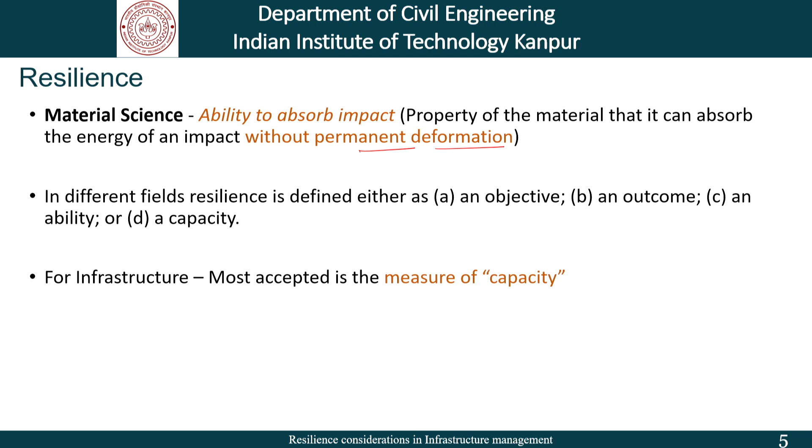In different contexts, resilience is often defined either as an objective, an outcome, an ability, or a capacity. For infrastructure, resilience is generally known as a measure of capacity. The United Nations Office for Disaster Risk Reduction defines resilience as the capacity of a system or community at risk to absorb, adapt, change and withstand the results of hazard in a timely and efficient manner, including through conservation and reconstruction of its structures and core functions through risk management.

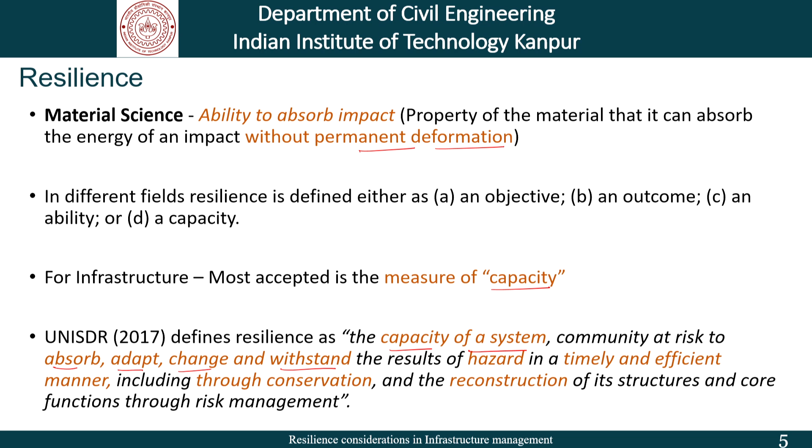Let us look into some key terms in this definition. As mentioned, resilience is a measure of capacity. So, resilience is defined as the capacity of the system to absorb the impact, then to adapt, change and withstand the results of a hazard, and this must be done in a timely and efficient manner. This could be through conservation and reconstruction. We will discuss some of these terms in detail in this lecture.

Let us break down this definition and see it from a different lens. Resilience, when talked about in a comprehensive manner, includes risk reducing strategies for the following aspects. The first is risk reducing strategy before the event, so before the hazard or event has occurred, you want to reduce risk. Second is coping on time, or facing the event in an efficient manner.

The third aspect is efficient post-event response. Once the disaster has occurred, how efficiently can we respond after the event. Fourth is efficient recovery measures, how quickly we can recover our assets again. And finally, how well can we adapt and transform so that in future the impacts of such events can be reduced.

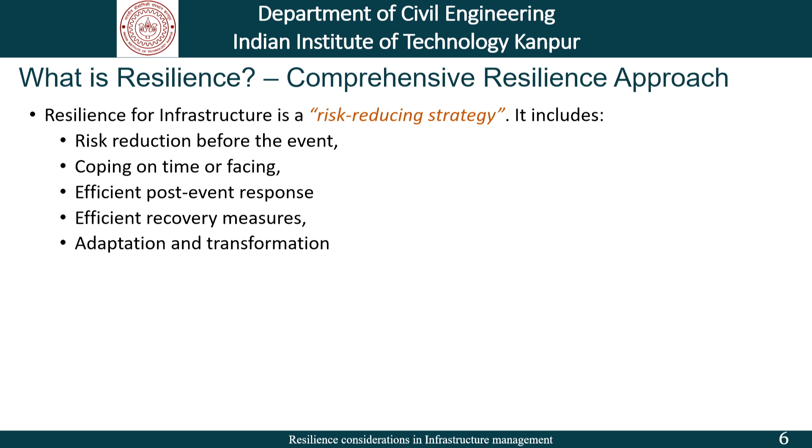So, a comprehensive resilience approach includes different aspects of risk reduction before the event, during the event, and after the event. In case of after the event, you want to ensure there are recovery measures in place so the infrastructure can be recovered quickly. Moreover, you want to adapt and transform so that in future the impact of such disasters can be reduced. Resilience thus deals with maintaining and enhancing the ability of a system to absorb, adapt and recover.

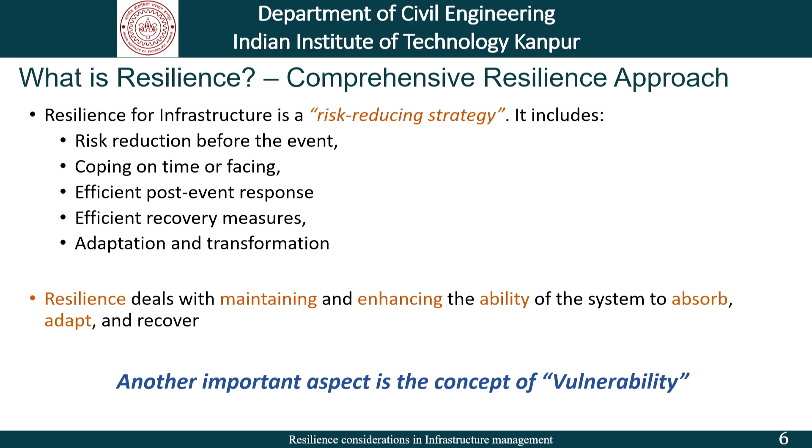In order to understand the concept of resilience, we must understand another important term, which is vulnerability. Before we discuss vulnerability, let us discuss the difference between a hazard and a disaster. Are these two terms different or are they the same? Please pause the video, think about it, and then proceed.

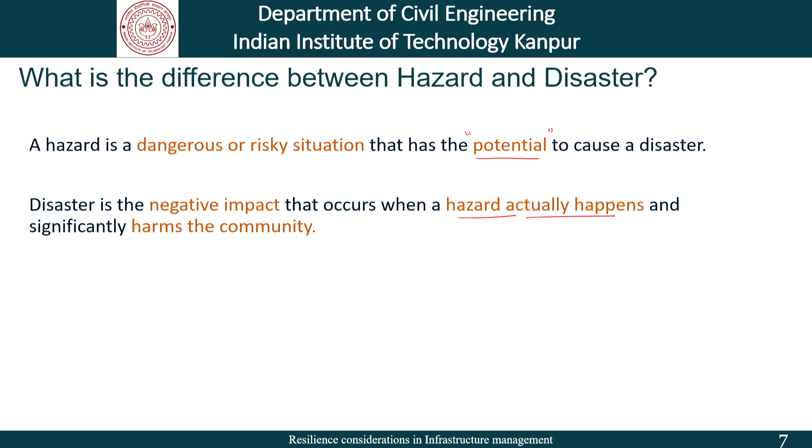Hazard is defined as a dangerous or risky situation that has the potential to cause a disaster. That is, any event which is risky or dangerous and has potential to cause a disaster is a hazard. Disaster is the actual negative impact that occurs when the hazard actually happens and it significantly harms the community. So, hazard is just a risky situation that has the potential to cause a disaster, while disaster is the actual negative impact faced by communities when the hazard actually happens.

To summarize, we can say that the likelihood that a hazard would lead to disaster is governed by the term vulnerability. That is, if you have a system which is highly vulnerable, the likelihood of a hazard becoming a disaster is very high. On the other hand, if you have a system which is not vulnerable, a potentially risky situation or hazard will not lead to a disaster, it will not significantly harm the community.

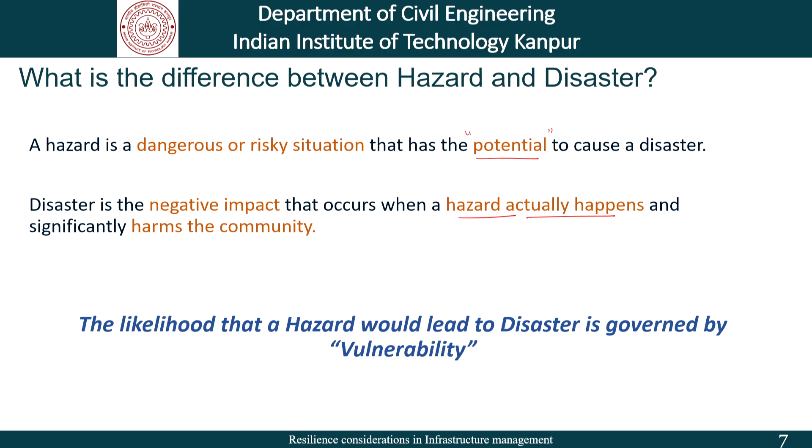Now, let us focus on different ways of understanding vulnerability. One good way is to divide it into three aspects: the first is physical fragility, the second is socio-economic fragility, and the third is lack of capacity to respond.

The first one is physical fragility, which means that the infrastructure, the human settlement, or the structure under consideration is itself vulnerable. It is physically vulnerable and cannot withstand the impact of a disaster. This is physical vulnerability or physical fragility.

The next one is socio-economic fragility. This means that in addition to the physical infrastructure, if there are some disadvantageous conditions, aspects of social segregation, or vulnerable populations which are more vulnerable. This second aspect deals with the community. Any disadvantageous conditions, aspects of social segregation, or presence of vulnerable communities define the socio-economic fragility. The idea is that vulnerable populations are more susceptible to a hazard compared to other members of the community.

The third aspect is lack of capacity to respond. Here we focus on the ability to mobilize resources so that the impact of a hazard can be reduced. So the three dimensions of vulnerability are: first, physical, the infrastructure itself; second, socio-economic, the community and people around it and the impact of infrastructure on them; and third, the capacity to mobilize enough resources to absorb the impact of hazard. These are the three dimensions of vulnerability.

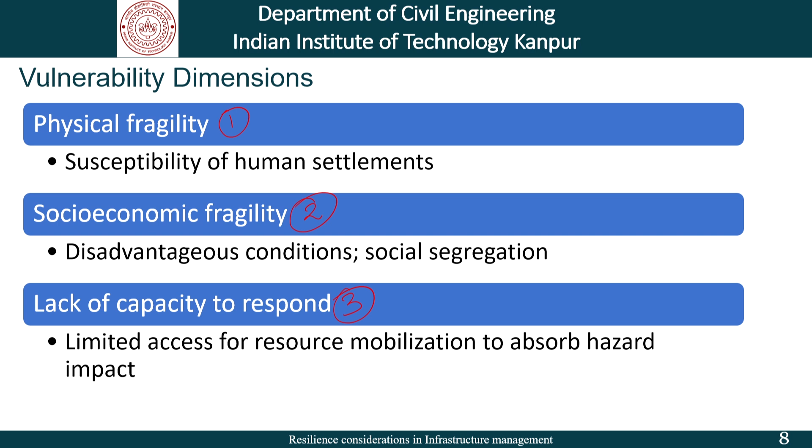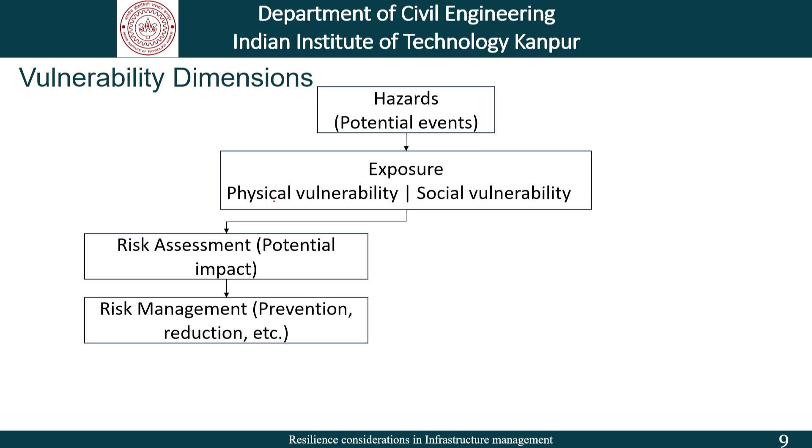Next, we try to understand the exposure levels as well as the intensities of hazards to do a comprehensive risk assessment, where we try to understand the potential impact of this particular disaster if it happens, and accordingly come up with different risk management strategies like prevention, reduction, mitigation, etc. However, we cannot always be successful, and there will be cases where these hazards actually lead to disasters. Disaster can be considered as the impact of this potential hazard.

Once there is a disaster, the focus shifts to disaster management. That is, once the disaster has occurred, you want to ensure that its impact is reduced and that you can recover quickly. So I hope the aspect of vulnerability is clear, that it focuses on both physical vulnerability and social vulnerability. The idea I want to communicate is this: in addition to infrastructure resilience, that is the resilience of the physical infrastructure, we also need to tackle socio-economic conditions. In doing so, it is possible to increase the resilience of communities to cope with an event, recover quickly, and build stronger to avoid future disasters.

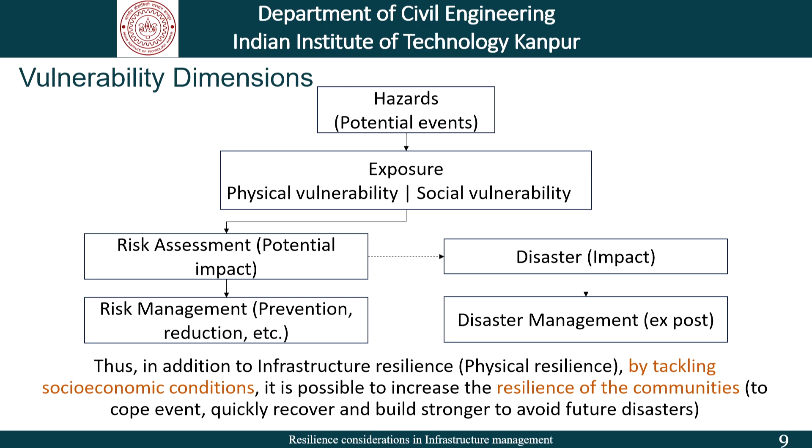Having discussed hazard, disaster, and vulnerability, let us move back to the idea of resilience. Resilient decision making for infrastructure includes two aspects: the first is developing or building resilient infrastructures, and the second is developing or building infrastructure for resilience. These are two sides of the same coin. In the first, the focus is on ensuring that the infrastructure we create is resilient — asset resilience, that is, the physical strength of the components.

For example, can the bridge withstand the earthquake? Or service resilience — the ability to maintain the service. Can the power grids reroute electricity if the line goes down? And so on. So in the first aspect, the focus is on making the infrastructure resilient.

On the other hand, the second aspect is developing infrastructure for resilience. This goes beyond the infrastructure under consideration and focuses on broader societal benefits, where the question is: do you have enough infrastructure to ensure community well-being and economic stability during the crisis event? Moreover, do you have systemic resilience, that is, does it help in managing large scale risks like climate change? So I hope the concept is clear that resilience includes both creating resilient infrastructure and creating infrastructure for resilience.

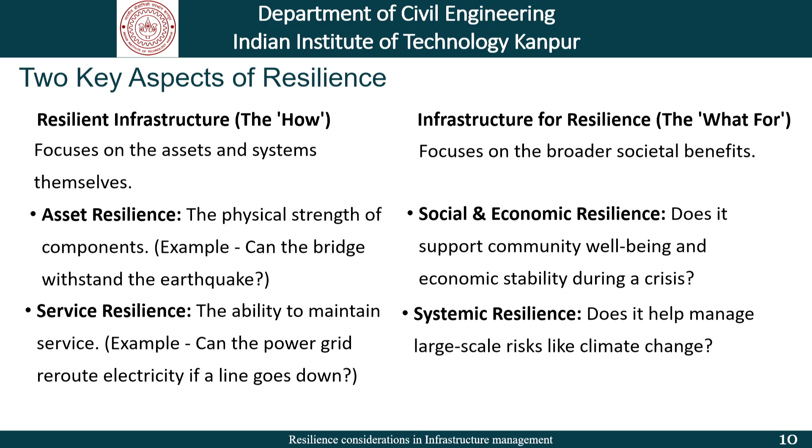Moving on, let us discuss why do we care about resilience? Why do we really need resilient infrastructure? Why are we concerned? The infrastructure which we have is always under stress. This is a key challenge which we need to adhere to. The systems are always under stress, and this stress can come from several reasons.

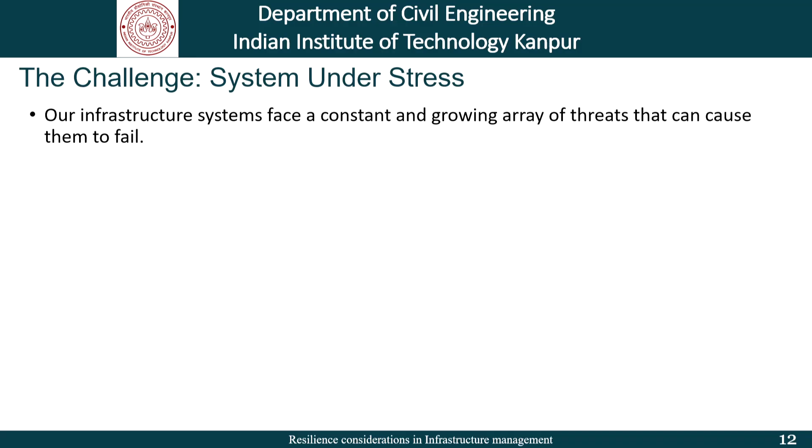Our infrastructures have to face a constant and growing array of threats which can cause them to fail. Let us discuss some of the reasons for these stresses. It can be things like natural hazards, for example earthquakes, floods, cyclones, landslides. Each of these impact our infrastructure, putting stress on our systems.

Second, there can be aspects of climate change, rising sea levels, extreme heat, droughts, etc., which again stresses our systems. Additionally, there can be systemic shocks like pandemics, supply chain collapse, financial crisis, and so on. There can also be man-made threats like cyber attacks, physical attacks, human errors, and so on, which again stresses our infrastructure.

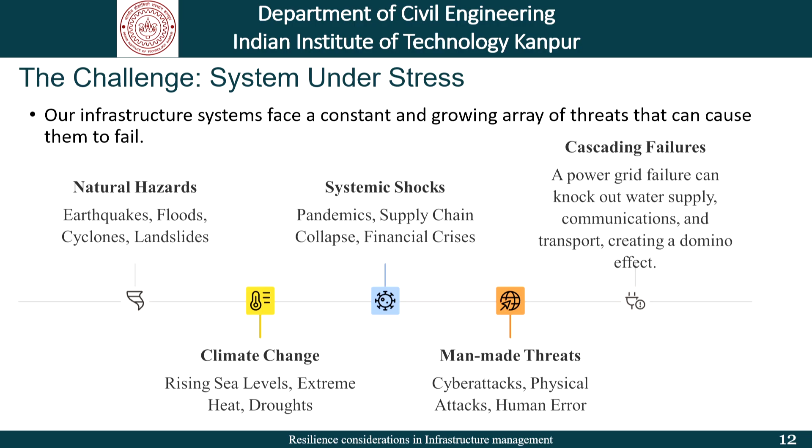Moreover, the main issue is that there are cascading failures. One system is connected to another system. These infrastructure systems are often interconnected, so failure in one system often cascades to another. For example, a power grid failure can knock out water supply, communications, and transport. Thus, one failure can have a domino effect impacting multiple systems. Our infrastructure systems are always under stress, and these stresses have been increasing continuously.

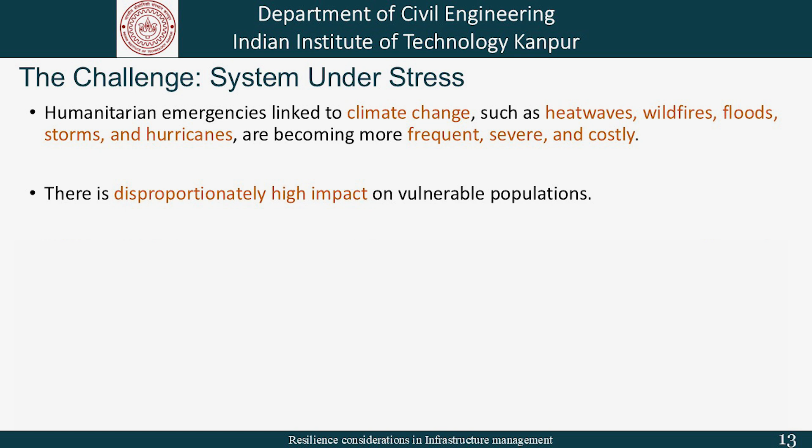Let us look at some examples which prove this point. Humanitarian emergencies linked to climate change, such as heat waves, wildfires, floods, storms, and hurricanes, have become more frequent, severe, as well as costly. Moreover, all these have a disproportionately high impact on vulnerable populations, and the number of vulnerable populations has also increased.

Another important aspect which should make us more conscious about resilience considerations is that 60% of the infrastructure which we will need in 2050 has not been built. That is, in the next 25-30 years we are going to construct a lot of infrastructure. This is our opportunity to ensure that any new infrastructure which comes up is resilient. The decisions we make today will define the world for decades to come.

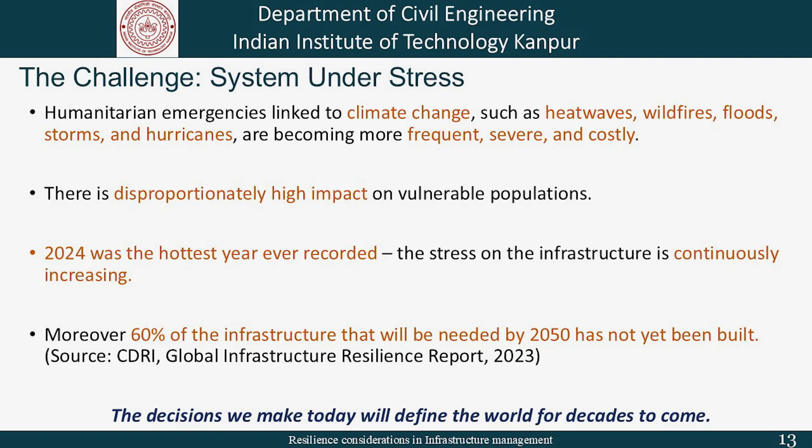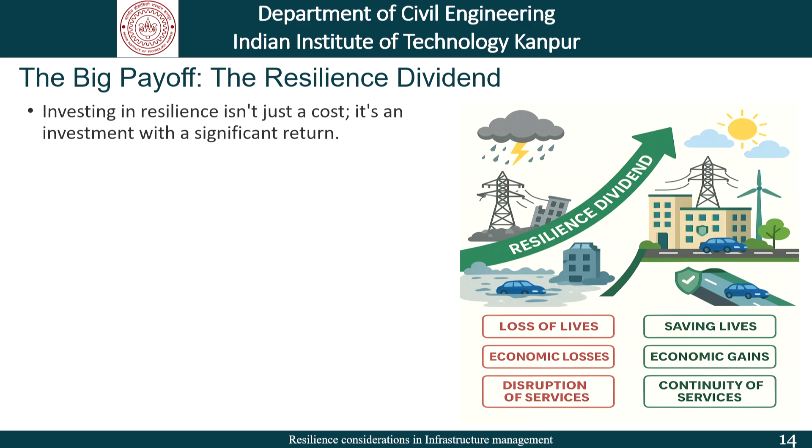This aspect can be communicated really well with the idea of resilience dividend. Let us discuss what is resilience dividend. It says that investing in resilience isn't just a cost, it is an investment with a significant return. It is believed that every $1 invested in making infrastructure resilient yields an average of $4 in benefits. The question is, how do we define these benefits? How do we say that every $1 invested leads to a benefit of $4?

The idea here is that in case there is a disaster, there will be loss of lives, economic losses, and disruption of services. If you have an infrastructure which is resilient, then you can save lives, ensure economic gains or at least no economic losses, and ensure continuity of services.

The resilience dividend can be defined as follows: the value of reduced future asset loss, avoided service disruption, wider social, economic and environmental co-benefits, and reduced systemic risk that occur over the life cycle of an infrastructure system is known as the dividend of resilience, or resilience dividend. This definition is available in a report by CDRI. I'll talk briefly about them in one of the slides later.

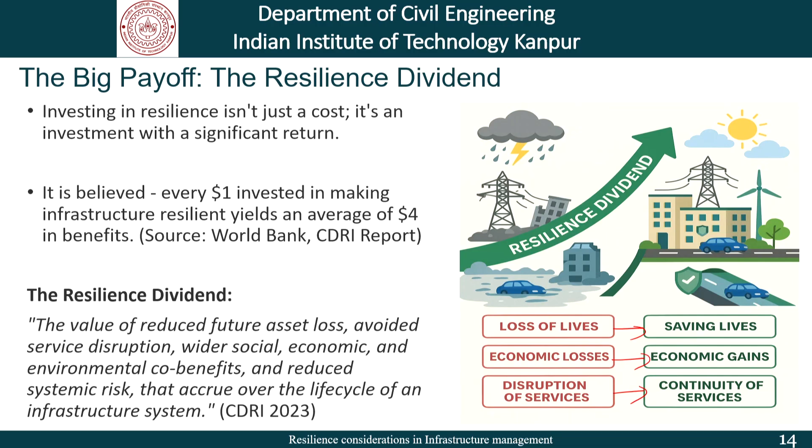Therefore, resilience is an important aspect in infrastructure decision making. There have been both global as well as local efforts to improve resilience of infrastructure. Let us look into some of these efforts.

Global efforts for climate compatible infrastructure include the following: OECD, the Organization for Economic Cooperation and Development, has urged governments worldwide to strengthen strategies for developing climate resilient infrastructure. A global coalition named the Coalition for Disaster Resilient Infrastructure (CDRI) was founded by India to advance discussion on disaster resilient infrastructure across various sectors. Moreover, the Global Center on Adaptation (GCA) has developed a comprehensive climate resilient infrastructure handbook.

There are several global efforts which emphasize the need to include resilience considerations in infrastructure. We want to ensure that the infrastructure sector aligns with the global resilience call. In this regard, different efforts taken by India include the following.

First, as I mentioned, CDRI. India spearheaded the establishment of this organization in 2019. It was launched by the Prime Minister of India at the United Nations Climate Action Summit. This organization has been fundamental in advancing efforts toward making our infrastructure resilient, which includes technological interventions, capacity building, education, developing communities of forums, etc.

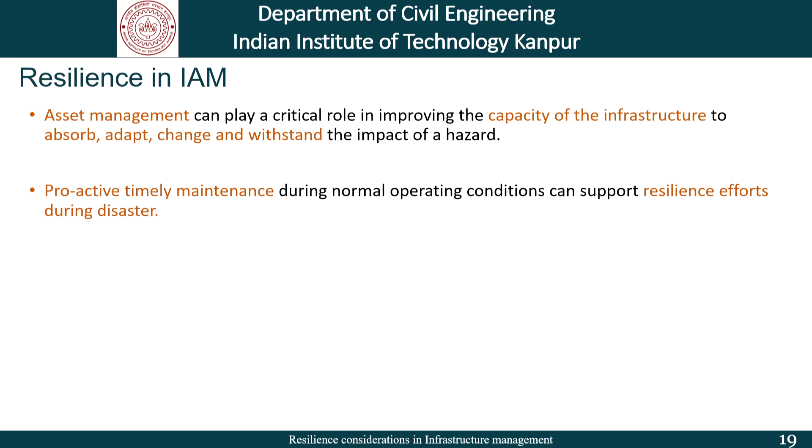Proactive, timely maintenance during normal operating conditions can support resilience efforts during disaster. Increasing urbanization, growing population, and rising needs have put excessive pressure on existing infrastructure, resulting in faster deterioration. This, coupled with extreme weather events, necessitates resilient asset management systems where the focus is on maintaining the assets both during normal conditions and during extreme weather events.

In the previous lectures, we have already seen how an infrastructure performs under normal operating conditions. We have seen that for any infrastructure, the performance goes down like this, where on the y-axis I have performance and on the x-axis I have time.

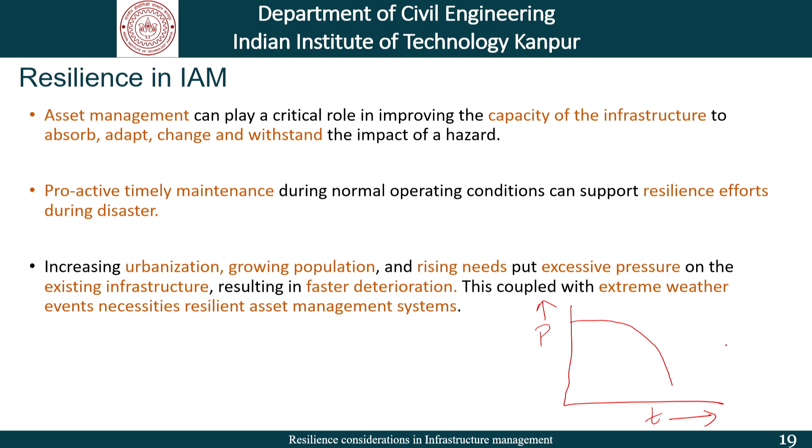Now, let us discuss how this performance curve changes under extreme conditions. Remember, this was under normal operating conditions. Now, under extreme weather events, the performance curve looks something like this. This curve is available in one of the publications which was published in 2023.

Let us look closely at this performance curve. First, focus on the dark blue line here. You will see that the dark blue line is drawn as a flat line before the onset of the disruptive event. Now, there can be any event which can disrupt this infrastructure. The moment that happens, there will be a point where the performance of the infrastructure starts to go down. How much it goes down will depend on the absorptive capacity of the infrastructure. So you see that the performance of an infrastructure has gone down when there is a disaster. Then there will be a point where the performance is minimum.

Now, once the disaster event is over, we will see there are three possibilities. The first possibility is that the impact of the disaster was so high that the infrastructure has completely collapsed. It looks something like this, which can be defined as the collapsing behavior. This is one situation which we want to avoid.

The second possibility is that the infrastructure starts to rebound and it has restorative capacity so that it regains its original performance. This is known as the robust behavior.

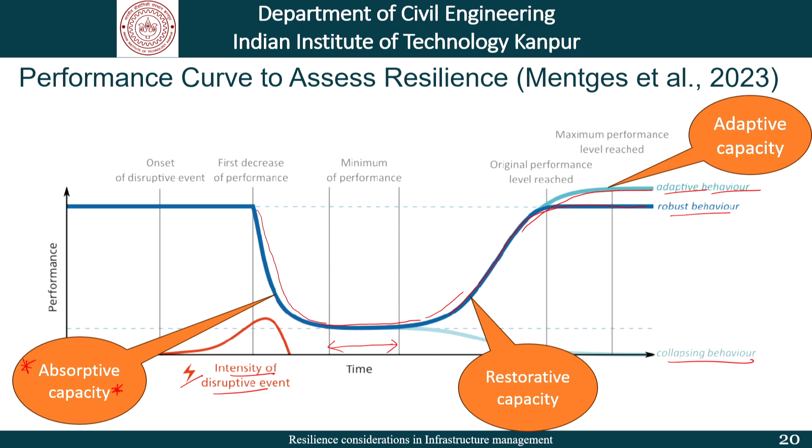Now the question is, where does asset maintenance come into consideration? We have discussed how an asset typically performs under extreme events. Now let us see how this relates to the idea of asset maintenance.

We saw that this is the curve for performance during extreme events, on the left side. Moreover, in this class, we have always seen that the performance, even under normal operating conditions, goes down with time. Thus, if we keep our infrastructure in a good performance condition, then hopefully at the onset of a disruptive event, the overall performance is decently high and it does not fall below the critical limit.

However, if there is no maintenance and say a disaster occurs when the performance is almost half, then we might see a situation where, since there is no maintenance done on time, the performance is already reduced, and now when there is a disaster event, the performance might fall below the critical limit—and that is the situation which we want to avoid.

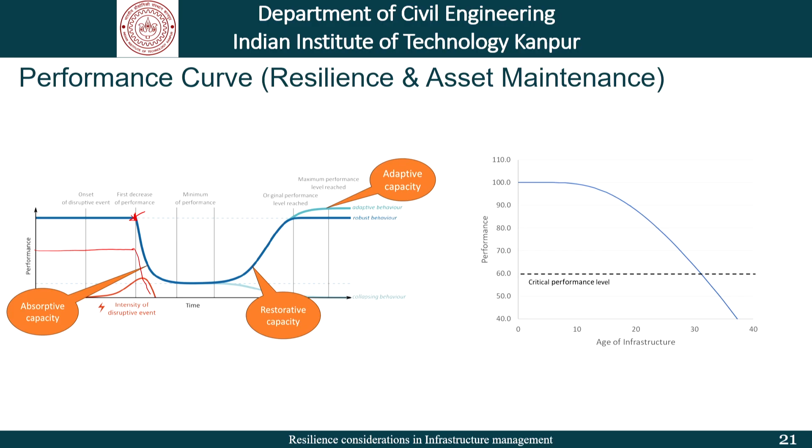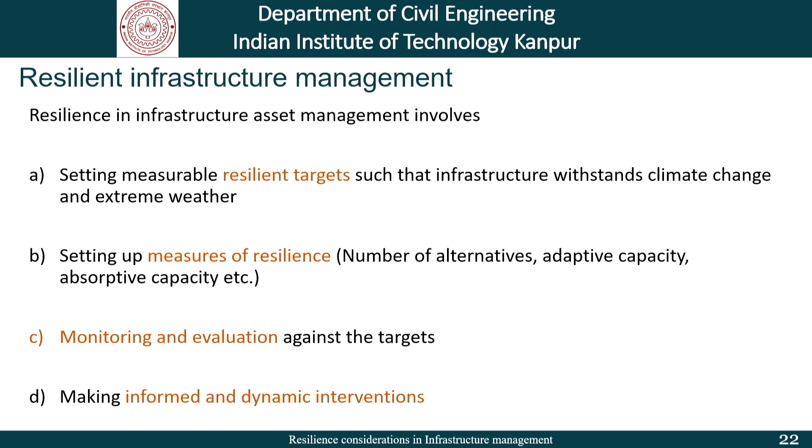Thus, it is important that we maintain and preserve our assets so that its overall performance is decently high. This will help us in our efforts for creating a resilient infrastructure. We have already seen resilient infrastructure management includes setting up measurable targets, setting up different measures, monitoring and evaluating these targets, and taking informed and dynamic interventions.

Now, in this case example, I will discuss how different measures of resilience can be defined in the context of highways. Resilience, as we have seen from its definition, includes 4 key dimensions.

The first one is robustness, which includes the ability of the system to withstand stresses. This is where absorb or withstand is coming into picture.

Then the next dimension is redundancy, where we are checking whether there are alternate systems available which can work as backups or substitutes. The idea here is if there are alternate systems available, then the vulnerability of this particular infrastructure is relatively low. However, if there is no redundancy in the system, then the infrastructure under consideration becomes critical, and effectively it also becomes more vulnerable.

In addition to robustness and redundancy, the third dimension is resourcefulness, where the focus is on the capacity to identify problems, establish priorities, and mobilize resources when facing threats or disruptions. That is, if we have enough resources to deal with any hazard effectively, then we can say that we are resourceful. This is another important dimension within resilience.

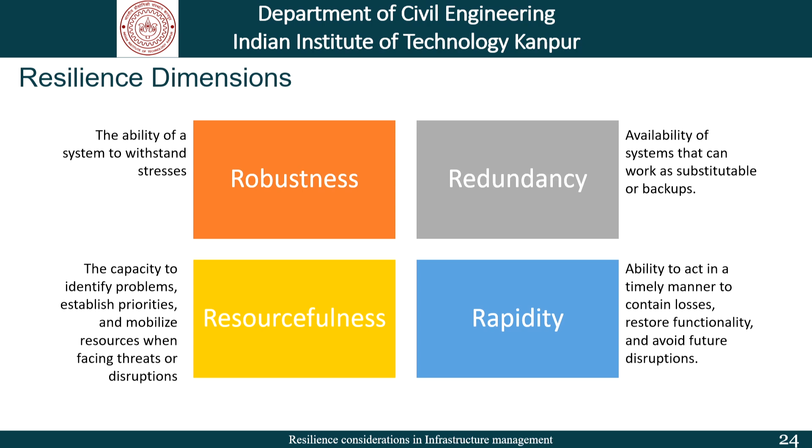So, I hope the concept of resilience and its dimensions is clear: robustness, the ability to withstand; redundancy, the ability to have multiple backups; resourcefulness, the capacity to have enough resources; and rapidity, the ability to act in a timely manner. All these 4 aspects determine our resilience efforts.

Now, let us discuss how we can define these in the context of highways. For a highway network, robustness may be defined as the quality and capacity of the road section. It can also be measured indirectly through seeing what was the length of disrupted roadways in past disasters. Lower disrupted roads means the infrastructure is robust. So, in infrastructure decision making, you want to increase the quality and capacity of the road section, or you want to increase robustness. The second dimension, redundancy, would include the number of lanes and the number of alternate routes available.

This will drive how much redundancy is there in a system. If there are multiple alternate routes, it is ideal because effectively you are reducing the vulnerability of an infrastructure system in a disaster.

Then resourcefulness could include what is the location of a project. Is it remote or is it connected well? Moreover, are there local community members? Are they prepared? Are they ready to participate? Are equipment and materials available if a particular infrastructure under consideration faces a disaster? All these aspects are part of resourcefulness.

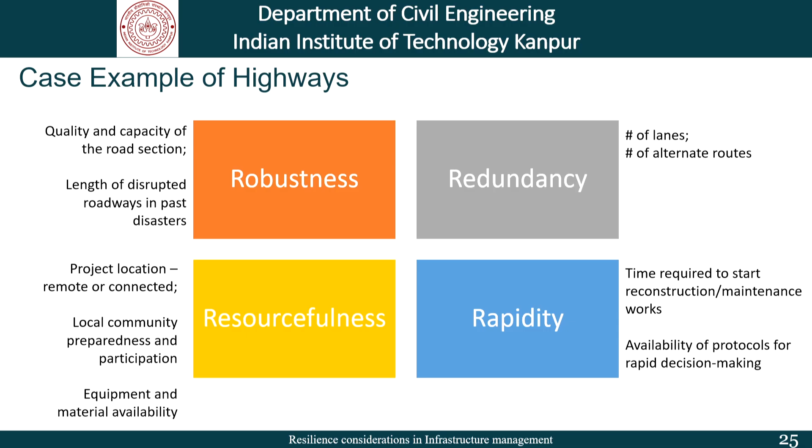With that, I would like to summarize this lecture where we have seen that resilience is not just an add-on. It is essential for preserving the infrastructure we build. Decision makers need to account for resilience when developing asset management plans. Similar to sustainability, this is a challenging task as it involves several objectives. Some of these objectives might even conflict with each other, or they might conflict with other performance or sustainability goals.

Finally, in this context, multi-criteria analysis approaches and multi-criteria optimization has been found suitable for taking such decisions. However, as we saw in the last lecture, these methods need to rely on relevant experts to provide appropriate criteria weights. One needs to decide how important is resilience in comparison to sustainability goals, how important is rapidity in comparison to resourcefulness within resilience, and so on.